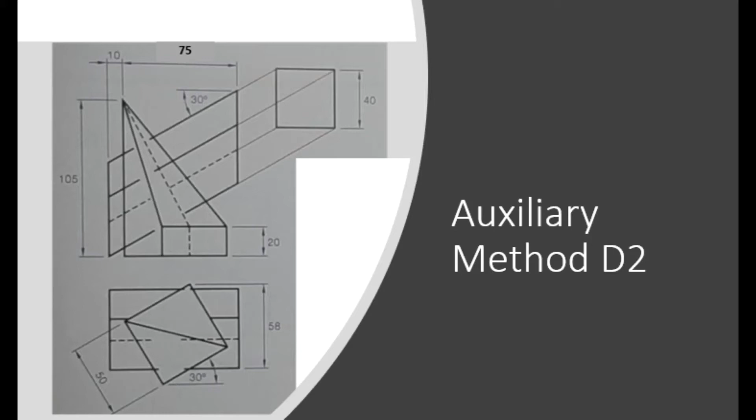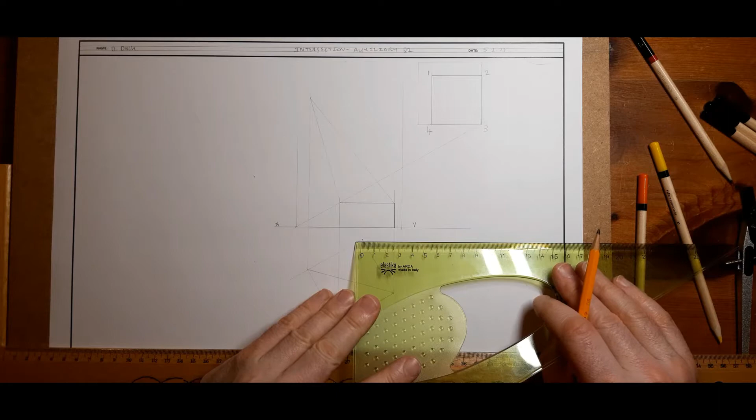Folks, welcome to the second question on intersection with the auxiliary method. I've gone ahead and set up this much of the question to save time. It's based on a 50mm square, and when you look down at it in plan, the object rises up to a point and is intersected by the square-based prism, which I've drawn and labeled 1, 2, 3, 4. For page spacing, I kept my XY line down 140mm, and this corner here in 160mm from the edge. We'll kick off from there.

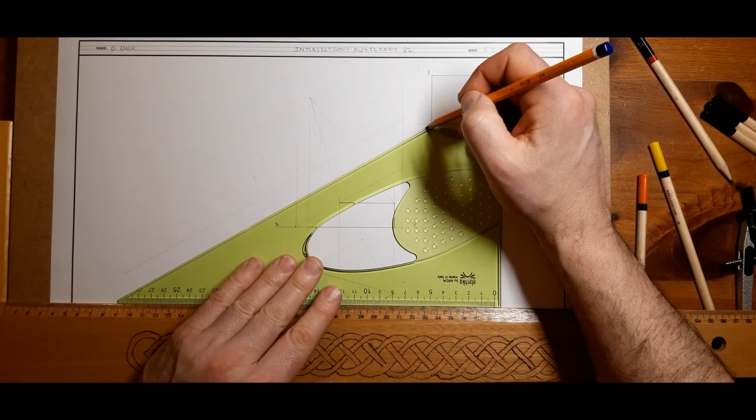So I have the 1, 2, 3, 4 set up. Next, I'll bring down these lines, and in fact you might as well run them down longer - we'll need them later on when we're doing that auxiliary. I'll just throw in my X1, Y1 line now, I'll need it later on anyways.

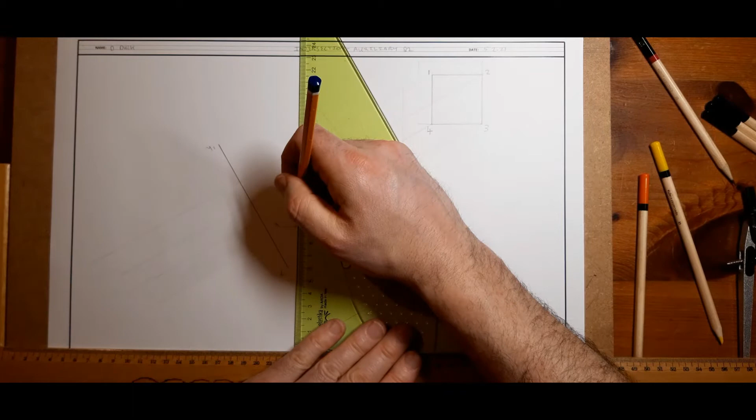Now, in these questions, they will always give you one of the lines in plan view, and it's very important that you're able to recognize which is which. As I look at the question, line 1 is going to be here, line 2 will be the near side, the far side there will be line 4, and the bottom will be line 3. Remember, if you were to stand there and look in this way, it hinges out that way - that's how it would appear flat when you look in along it. So: 1, 2, 3, and 4.

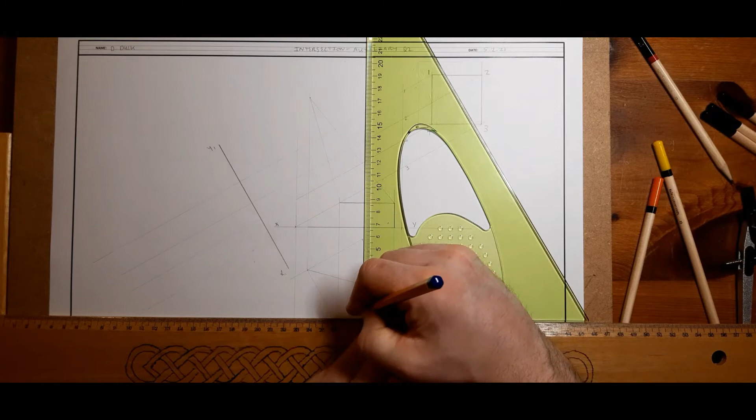Now, the only line we are given is the lowest one in plan view, and we are told that it is 58mm down from this corner here. So we'll measure down 58mm and put in a light line there.

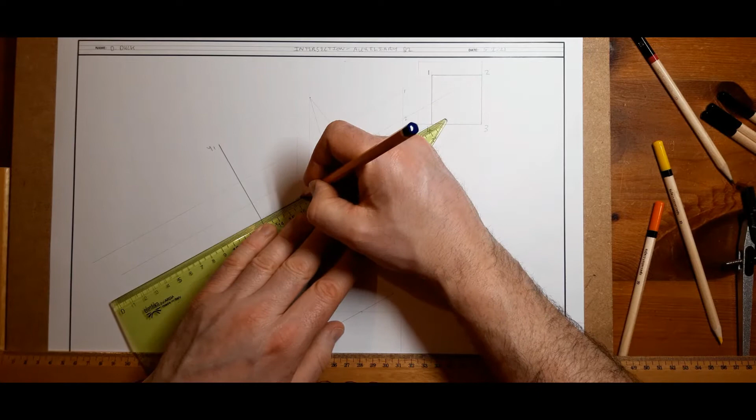Now, that is the closest line to me in plan. So when I'm looking in this way in elevation, I know that this is going to be line 2 - the closest one to me. This guy is going to be in hidden detail, we're showing that in the question, so I'll put him in dash - don't forget that. This guy is going to be the closest, line 2, so this is line 2 down here. As you stand in looking in there, the closest edge will be line 2 to us. Now, what we'll go and do after that then...

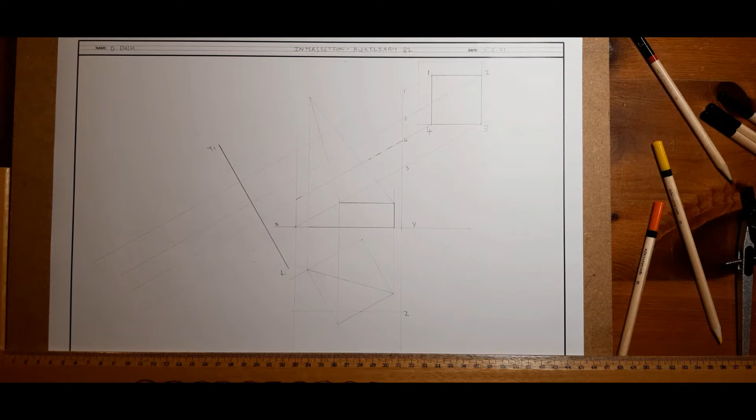So what we have to go and do after that is find out how far these are spaced apart here in plan view, and we will get those measurements up here in our auxiliary.

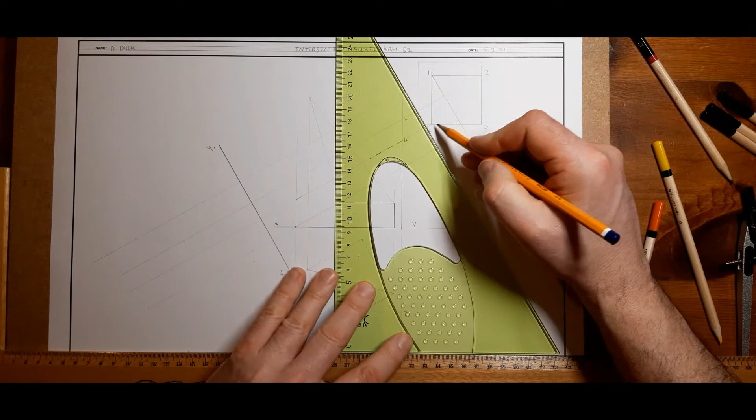This is another auxiliary of the square-based prism. So if we draw down a series of lines perpendicular to our lines of projection, I will find out - this is all like the same thing as looking directly down on top of this object - how far these are spaced apart.

So that is the distance from 4 to 1, we'll call that D1. D2 here could be from 1 to 3, call that D2. And the third distance, D3, is from 3 to 2 there. Now they do change in each view, because if 2 is the closest one up here, it's the nearest one down here then - it's the closest one to us.

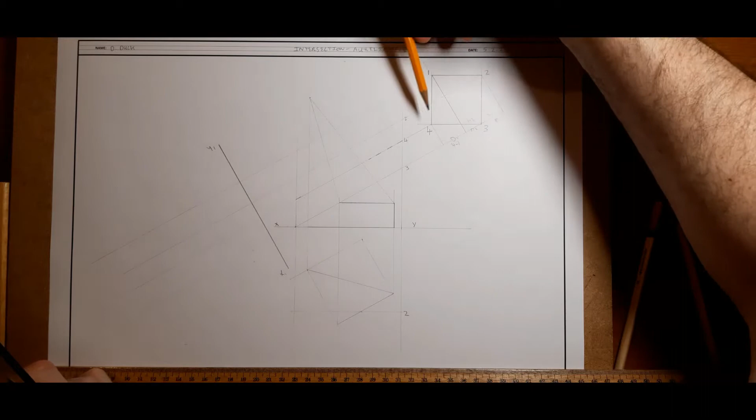So to space them out, the next one given in the question is the hidden detail one. When you look down from the top, you will see 2, 1 and 4, but this is 3, so I need that distance there. We'll get that with our compass and mark it off there, so 3 will be on that line there. I know the distance, so I can mark them off then.

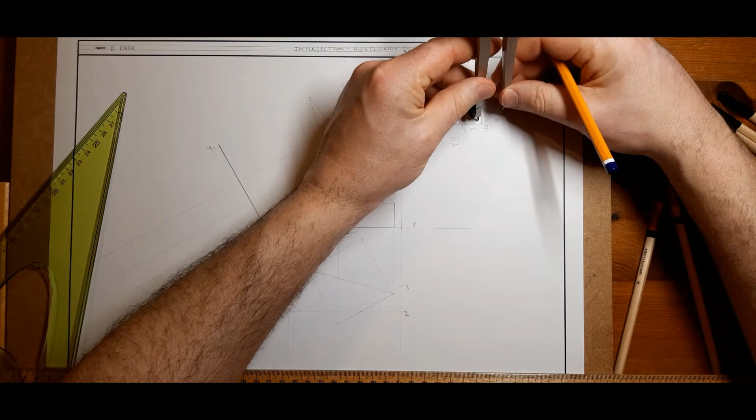The next one will be the top one - this next line, which will be my line 1 when I'm looking down on top of that. So I can get the distance from 2 to that. You could also measure this distance here and just add it on, it's the same thing. So that'll get me line 1. And then the distance from 2 to 4.

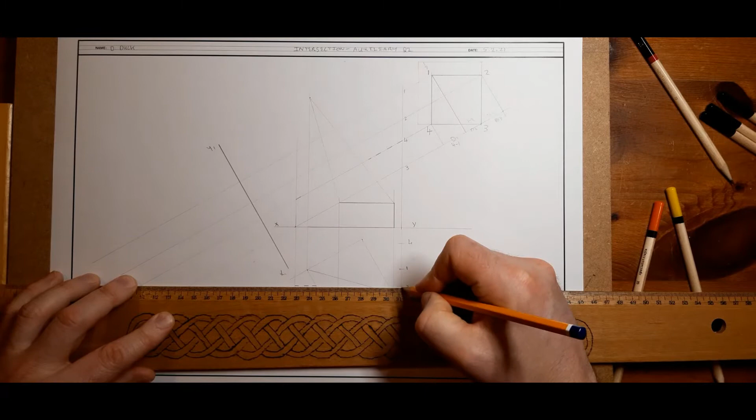And I can draw in those lines lightly now. And 3 will be in hidden detail in the plan view. 1 we'll see all of it. Just draw it in lightly so far. We don't know where it's going to start and stop, of course. And that is the plan view lightly set out in construction. So we need to find out where all these guys start and stop.

So the next thing we're going to do now is we are going to go and set up the auxiliary down here on the left hand side. So again, we need to bring down all points, and actually we have it set up at 30 degrees this time, which is very handy for us. So we can bring down all points of interest to us.

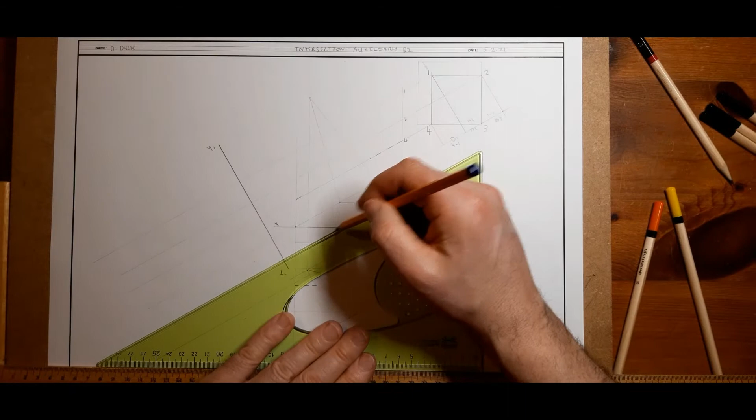And we'll just label them then for clarity. So we have these 1, 2, 3, 4. I'll call the main corners on this A, B, C. O is there, so we'll just leave it. That could be a corner as well. We'll just call that O.

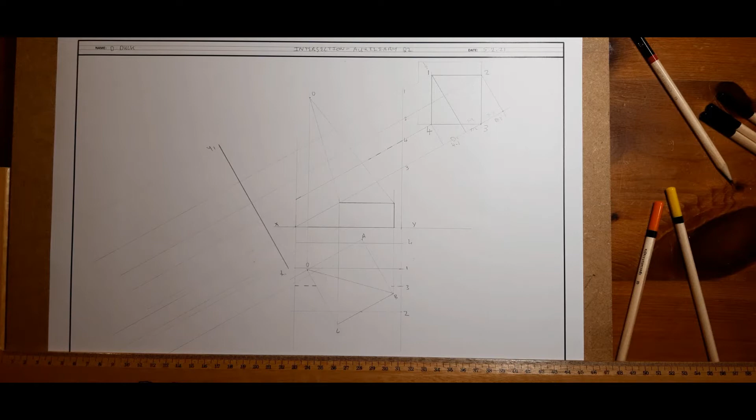And we'll just measure them out now and we'll get them set up in the plan view. So again, this is a new view. 1 view is back, 2 views back. The measurements are the same. So we can start off there. I usually, when I'm marking these off, I go with the first point away, which is C.

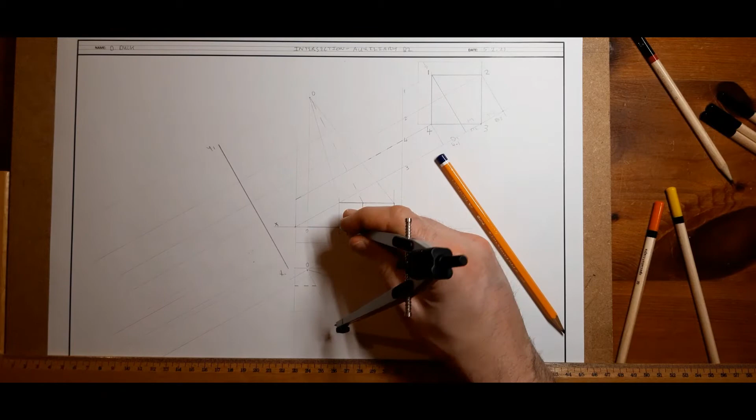We'll just label them there now as well in elevation to avoid any confusion later on. That corner now in elevation beyond the back. That's A, C, and B, and we'll call that corner O. So I get the first one away usually. Mark off C, put it down here. Let's see, and we'll keep going through them now.

Measure B here off the XY line. Move it over. And then I need to continue on that. And so on. So I'll stop talking now and I'll measure off all the rest of my points.

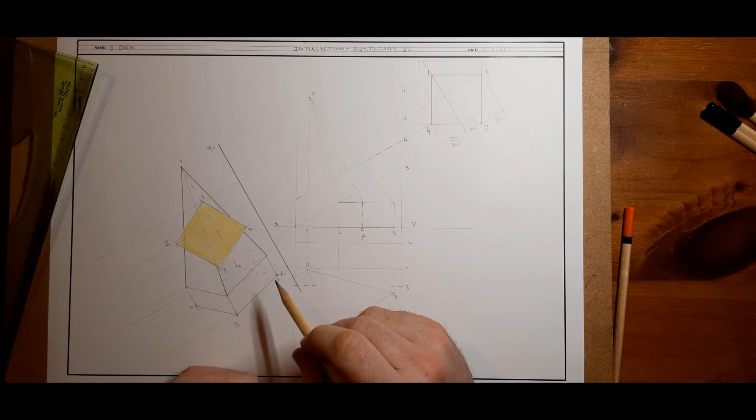Now, so when we have that set up, we now see looking in at our square base prism intersecting that object, okay? And now we're going to mark off all the points of interest to us. Now, because it's sticking out on the left-hand side and on the right, 2 and 4 are not going to come into play as we look in here at it. So what we're going to get out of that is we're going to get a line of intersection like a loop on the top, and we're going to get a line of intersection on the bottom.

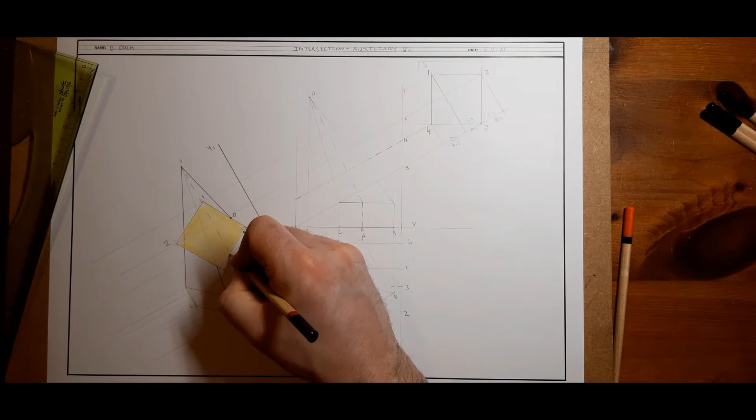So let's label up all points. So we called that already. I already used up A, B, and C, so we'll just continue on from there then. So starting at 1, if I go clockwise, first point of interest there will be D. Go to 4, I call this guy E. Point of interest there at the back, F. Down to 3, up to G, over here to H, up to 2, over here to I. Another one here at J, and there's one again there on the back, K, just before it goes back to corner 1. Okay, so a good few points there.

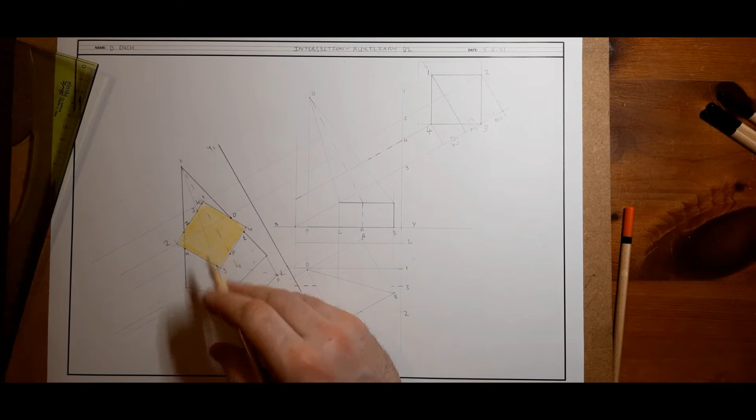So we've got to take into account for that now. So again, if I was to, I would encourage you to go labeling that.

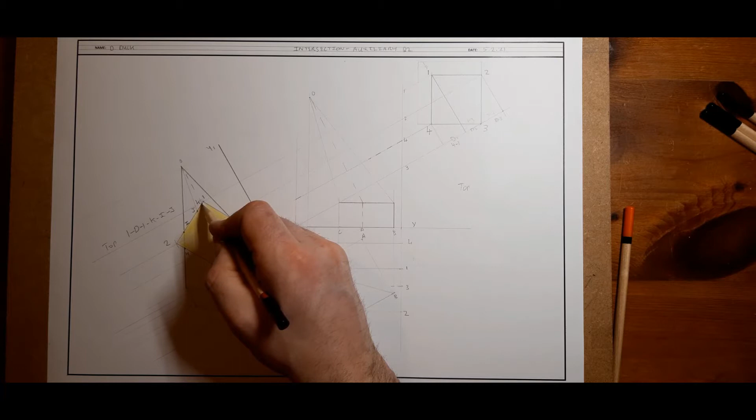So maybe on the top, as we want to call it over here, you can write it over here if you find it handier. On the top, the line of intersection is going to go from, on the near side now as we see it, from 1 to D. It's going to turn the corner at D, okay, and it's going to go back up to 1 on the far side. Then from 1 on the back side, it's going to go to K. From K, on the back corner there, it's going to come all the way down to I, turn the corner back onto this face here, up onto J, and then from J, it's going to go straight to 1, not to K, because K is on the back side. So it's doing a loop from one side to the other.

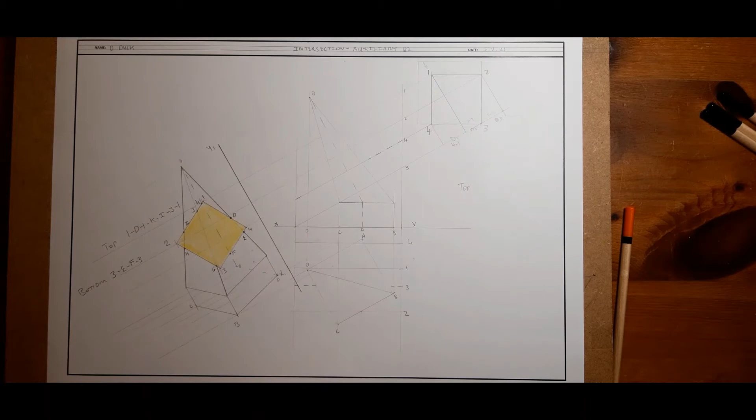On the bottom then, if we want to put it in there, so let's start off at 3, for example. So we'll go from 3, on the near side as we see it, to E. Then from E, it'll go on the back face there down to F. Then it will go from F to 3, on the back. Then from 3, it will go all the way up to H. And then it will go from H down to G. And finally then from G back to 3. So again, it has done a loop right around the object.

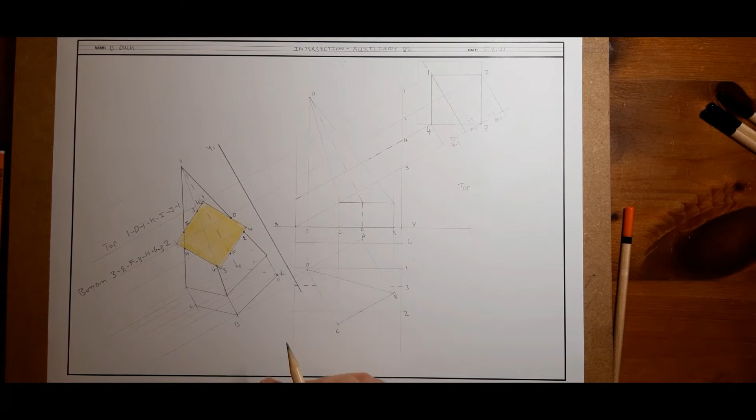And if we follow these when we're reconnecting the lines, we can't go wrong. Okay, so that's the beauty about doing that, taking that moment to do that. So now finding some of these will not be a problem. I'll just put B higher up there and C and A. So let's find as many of these points as we can now in our elevation first of all.

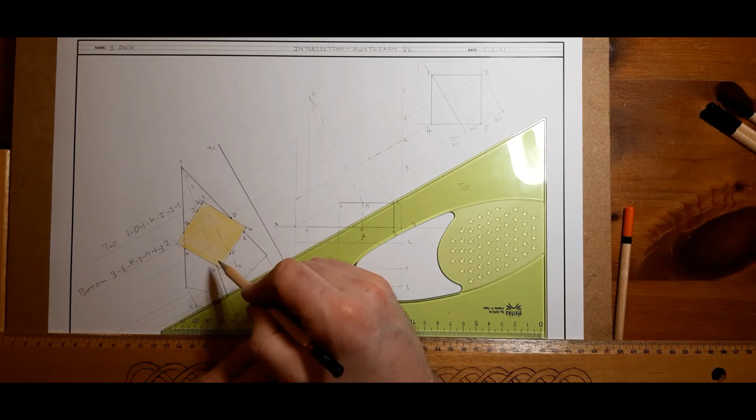So for example, when we're looking at G, it's the lowest down one. G is on the corner from B to the top of the object. So we'll bring that up there. There's line B, going up to the top of the object. So that gets me G there.

And we keep doing the same for the rest of them. F is on that back corner, going from C on the bottom to the top. So bring that up there. That gets me F.

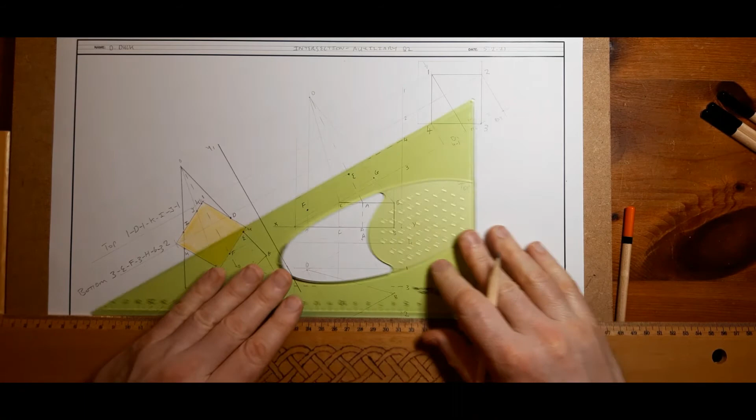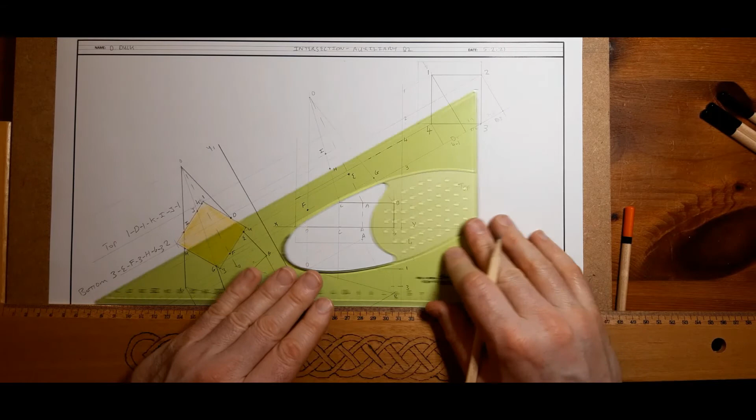Next one, E is on this corner from A to the top. So find that one there. E will be there. H is on the corner from C to the top. That will get me H. I is also on this line. And D is on that corner from A.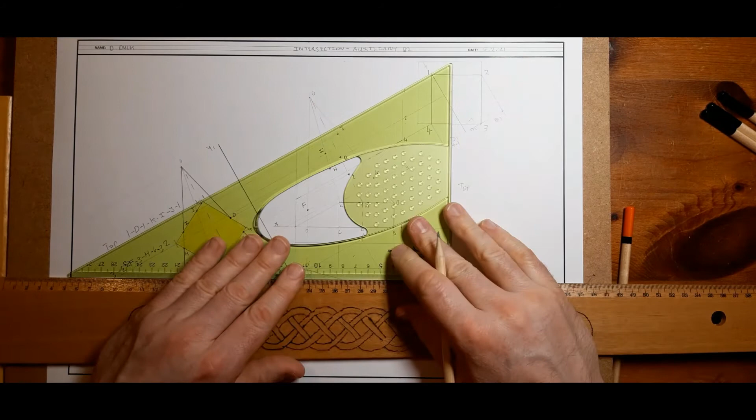And then we have J coming up here. J is on the corner from B to the top. K is on the back corner.

And this is the beauty about labeling, folks. I have to say, if I didn't label that, there is no way I would be able to do that. So make sure you label all these drawings.

Now after that, we have all our points there. We still need to find out, 2 and 4 won't come into play, but 3 and 1 will, so we need to find those points. Remember, there's a 3 on the near side and a 3 on the back side of this object. Same with 1, there's a 1 on the near side and a 1 on the back side of the object.

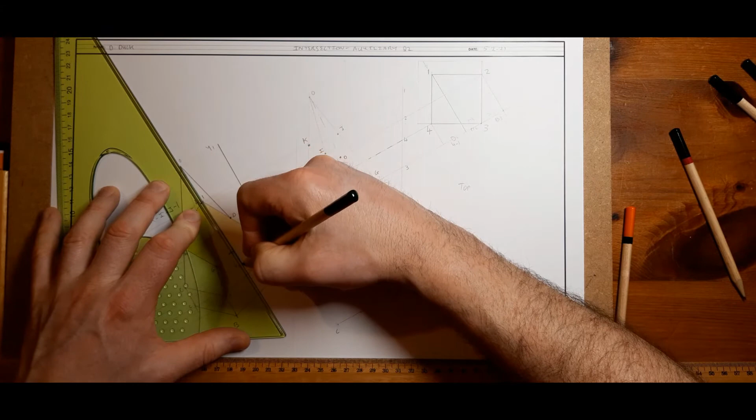So I'll use green here to find 1. I'll start at the top, drawing this line in here through 1, on down till we hit the base there. And we'll recreate this up now in our plane or in our elevation. So if I follow that line up there, it hits the ground there between O and A. And I'll redraw in that green line.

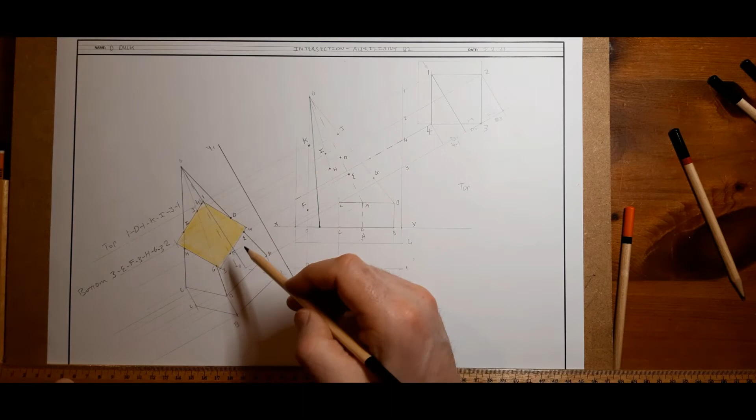And now I can find point 1 on that. Now that'll just get me point 1 on the back side, by the way. That is point 1 on the back side.

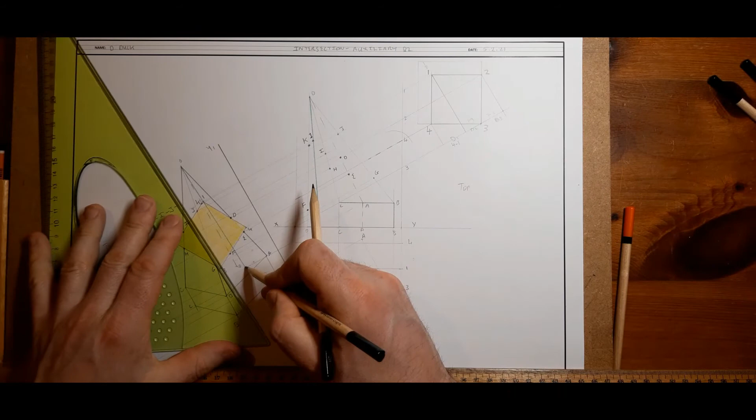Now I'm going to extend this line because I need to find 1 on the front. So I'm going to extend down this line and it's going to hit the line now between B and A. So let's get that point in our elevation. There's the line between B and A, and I'll redraw in that green line. And it will cross here. That will find me 1 up here.

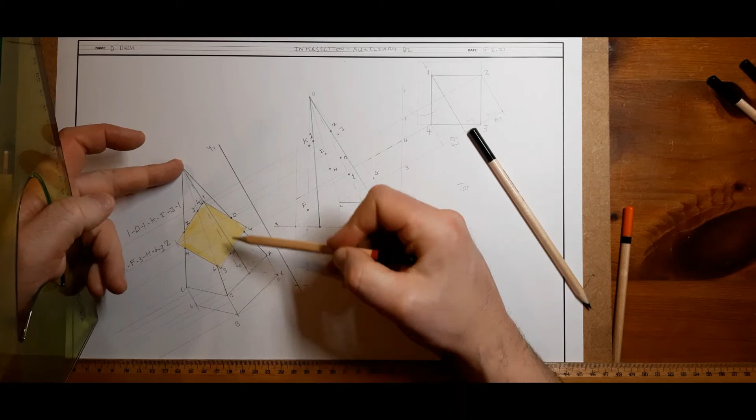So the first green line only went down to the bottom. That was to get the 1 on the back. Then I extended the green line down, because I need to find 1 on the front. So 1 on the front is happening on this surface here. And so I stopped on BA, found that, and that got me the point 1.

And I'm going to do the same thing over here now to get point 3. So first of all, there's a 3 in the back. Let's find that guy first. And I just need to join in my corner here to do that.

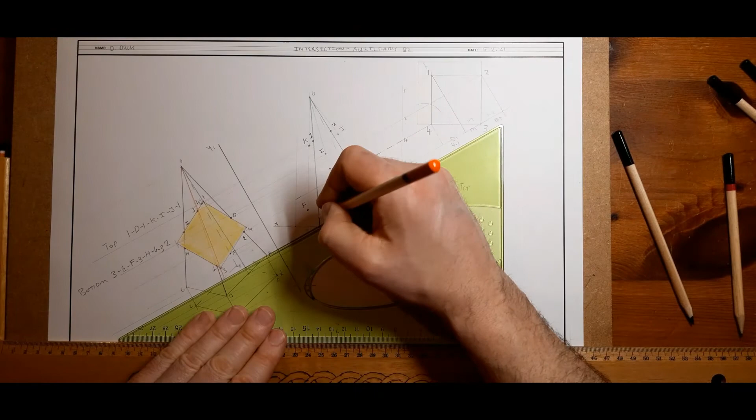So I'm starting at the top, drawing in this line, this orange line through 3, down till it hits the ground. So we find that line in elevation, bring it up there, that's where it hits the ground. This will get us 3 on the back side now.

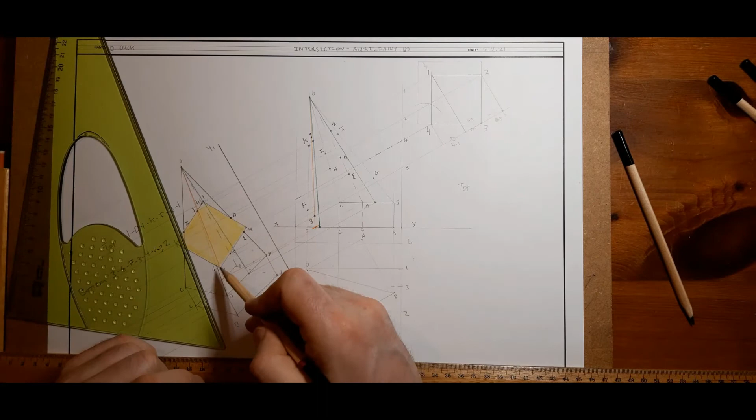And 3 is on this line. And now we need 3 on the front. So 3 on the front, we'll just extend it down now. Start at the top, draw through 3, and it hits the line BA right here. Let's find that in elevation. And redraw in that for the front side of the object. That will get me 3.

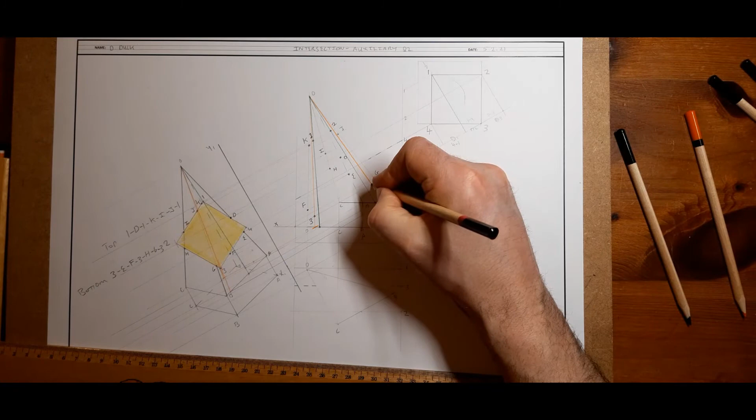Now I'll just pause for a second. So these drawings are going to be quite detailed. Once you get used to them, they're not hard at all, but they are time consuming. Okay, so we've got all our points now for our elevation. So I think it'd be a good idea now maybe if we go ahead and draw in as much of this as we can.

Point 2 is not going to come into play. So when we're looking in elevation, we can see that point 2 is not coming into play at all with the object. So up here, you can draw that guy heavy right across there.

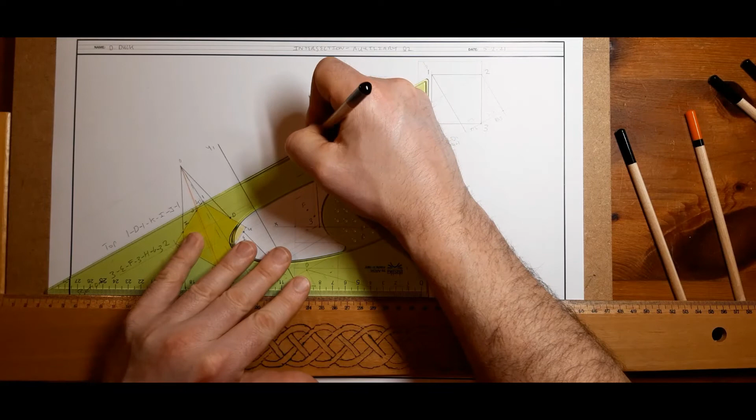We can see how far these guys come in now. He comes in as far as 1 there. It'll be slightly in hidden detail, a tiny bit of it. On the back, a slight bit of hidden detail to get out to the edge of the object. And then he goes down as far as there. 4 does not come into play at all because he's outside the object. We can see that there, so we can just put him in hidden detail going right through the object.

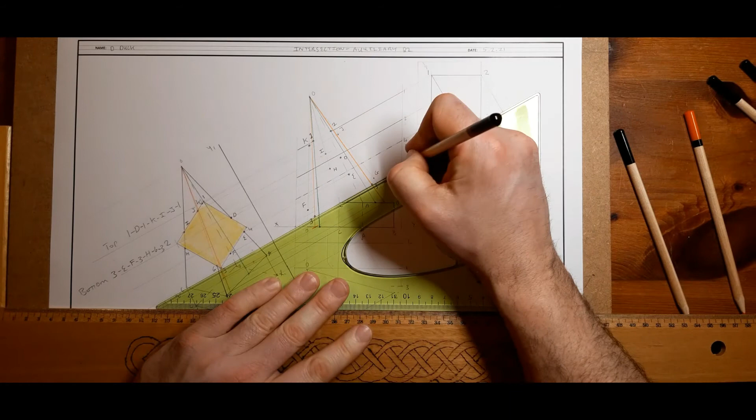And then 3, we can see where 3 is there now. 3 is on this side just behind it, so we won't see it, we'll see it up as far as here, and then this piece here will be hidden detail. On the back, we'll be able to see it, that's fine. Where he hits that face, between O and C, we will be able to see that. So we're okay there.

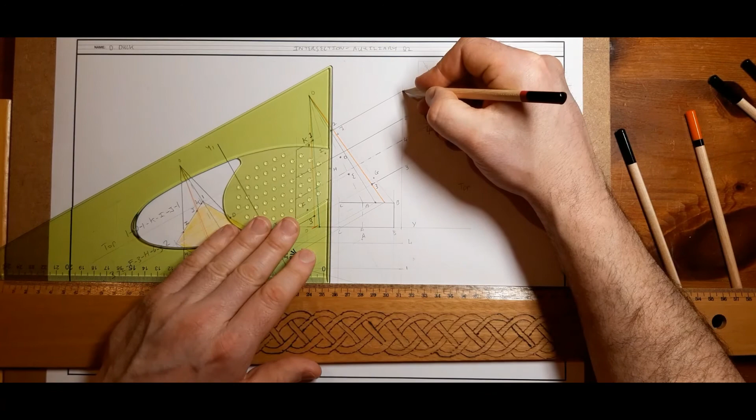Now, I always recommend you do these lines first, to help you with the visualization. So we've got that now. Now it is time to do the line of intersection. And again, if we follow this, we cannot go wrong.

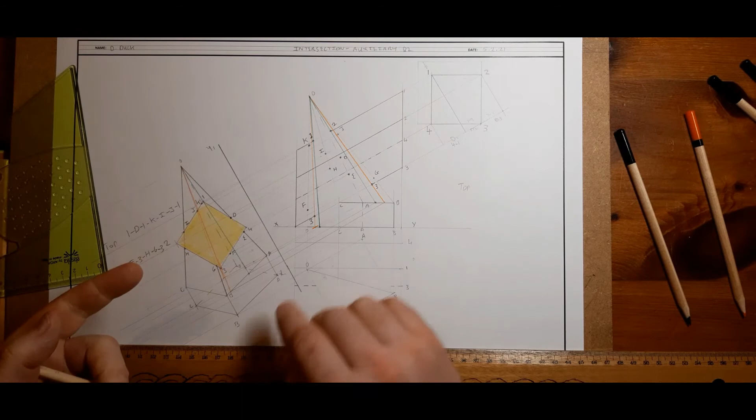So remember now, when your elevation is there, this will be the closest side to you as you look in here. So you'll be able to see all this, the full line of 2 there. There it is in our auxiliary, there it is in our elevation.

So that means we'll be able to see, for example, on the near side there, where 1 is going down to J. Let's do that a bit heavier. It's going to go down to J, turn the corner at I, as we said, and go back up around. So we'll start off by labeling our drawing.

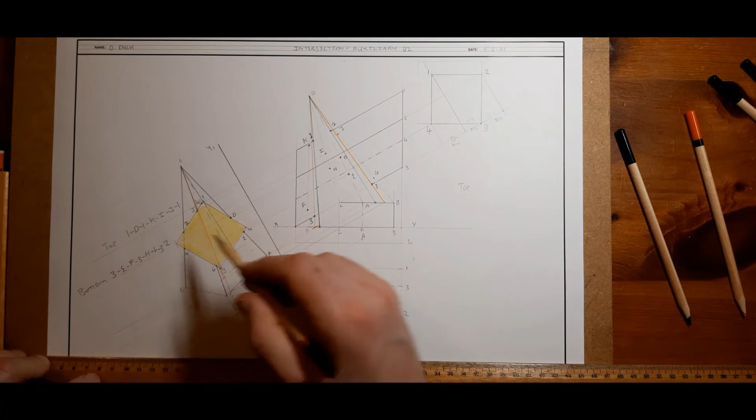Following this, we'll start there and go with the sequencing, and we can't go wrong. So if we start on the back side and go from 1 to D, and then we're going to come back up to 1, that's going to be in hidden detail, we won't be able to see that bit.

1 to D, back up to 1. Next one, actually I went the other way when I was sequencing this, but it doesn't matter, we'll go this way. So 1 to D, back up to 1, then we're going to go to K, that's going to be in hidden detail there. And then at K, from K on, we'll be able to see what's happening.

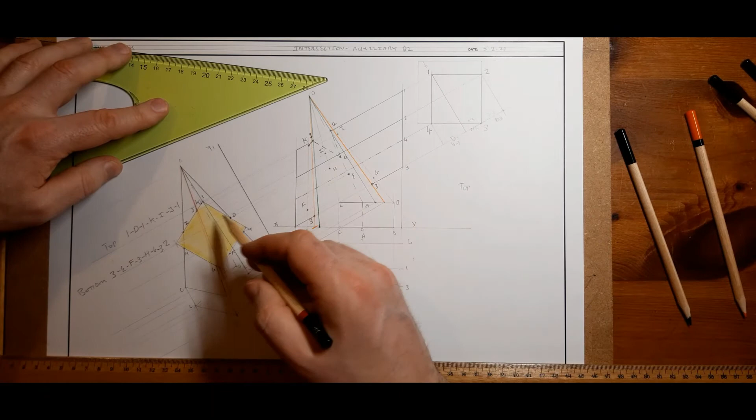We will go from K to I, then from I up to J, and then from J we are going back to 1 there.

So we'll start off now and finish out the bottom side as well, going by our 3 sequencing. Remember, you'll be able to see this side and the other side around the corner, but this back side, this face here, you will not be able to see. So if we start at 3, we're going to go from 3 to E, in hidden detail, then E to F, hidden detail.

Then it'll become visible in elevation, it will come into view. We'll be able to go from F back to 3, we'll see that. We'll be able to go from 3 up to H, H down to G, and back to 3 then in hidden detail. So let's do that.

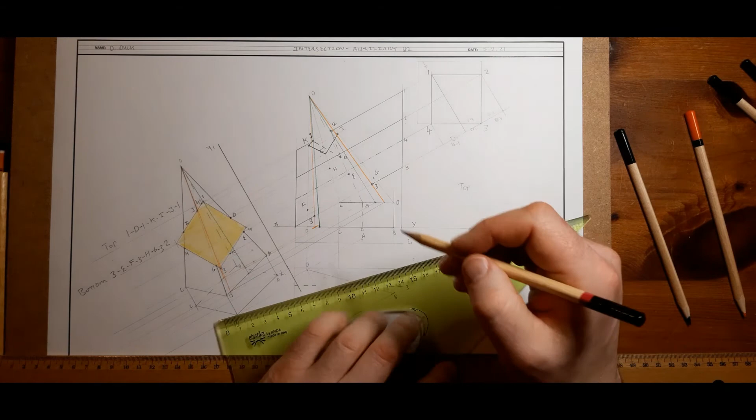Starting off there, as we said, we're going to go from 3 up to E.

So now we'll finish out the bottom side there and use our number sequencing again. Just remember you can see this side in your elevation and the side around the corner, but you can't see this face or the one on the back side here. So if we start there, this 3 will start on the near side. So 3 is going to go to E, we won't be able to see that, in hidden detail. E then will go down to F.

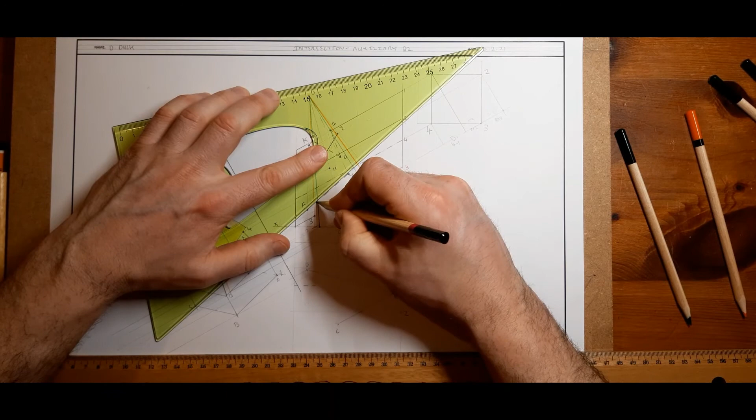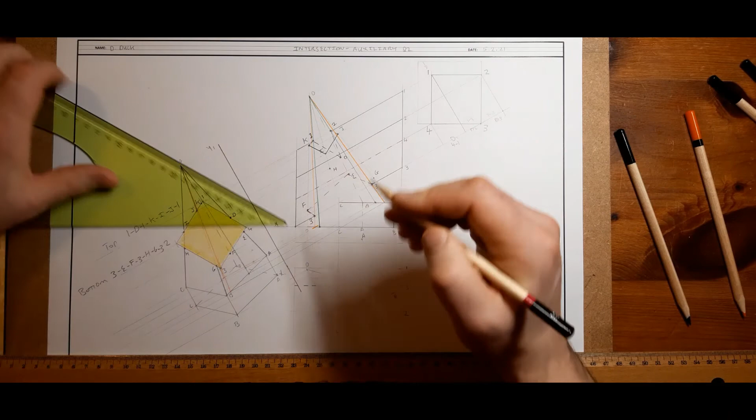F then will go back to 3, and from this point on we'll be able to see just that piece there. 3 then is going to go from 3 up to H, but that will be in hidden detail because of the way the object is twisted. So 3 is going to go up to H.

Then from H, following our sequencing, we're going back down to G. We'll be able to see that, it's on this face here. G to 3 we will not be able to see. That's our last point to join up.

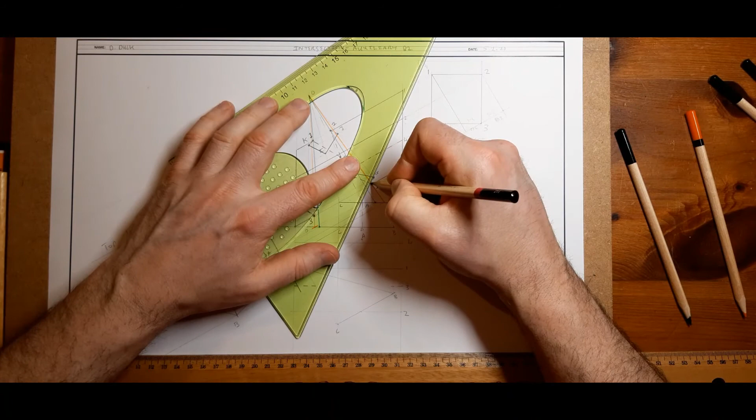And we can finish out our corners heavy now in elevation to help with the visualization.

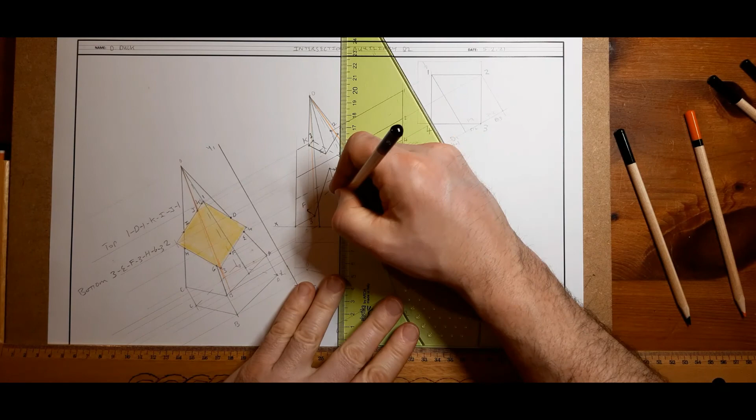Now the next thing we're going to do is get all the points. I'm going to locate down these here, and then I'll talk us through finishing them again. It will be the same anyway, following that sequence, just the lines of what you can see and not see will be slightly different.

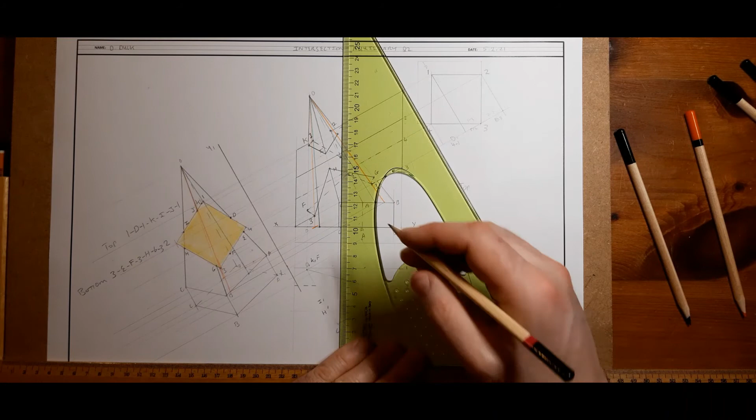Hi folks, you might notice some of the drawing has been coloured in, and I've got all the points in plan view. My phone died, so while waiting for it to charge, I coloured it in as well to help with the visualization. We'll continue on now and finish off the plan view.

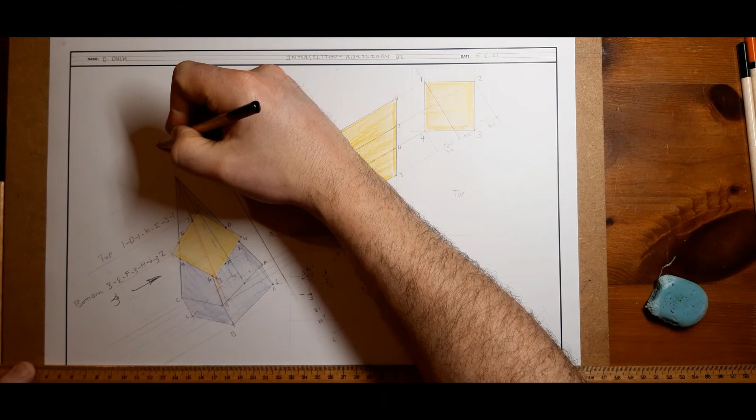So again, I'm going to use the sequence we lined up. Now remember, when you're drawing your elevation, you were looking in this way. But when doing our plan view, just for seeing what lines we will and won't see, you have to imagine yourself looking in from above, looking directly down on that.

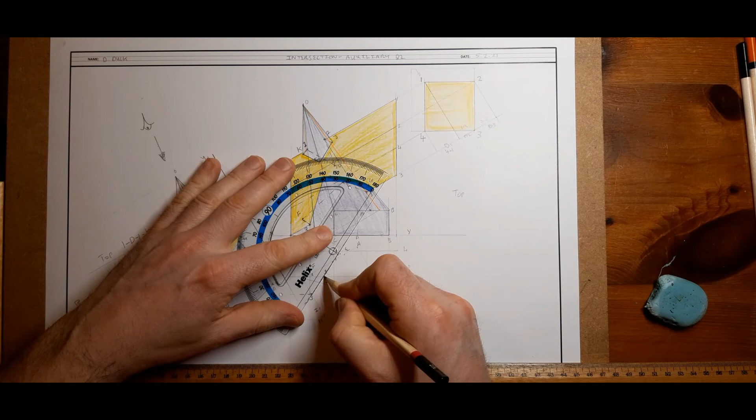So I'm going to start at 1, and go off down here. You can see there, if you're looking straight down, you would see going from 1 to D. I'll draw that heavy there. Then it's going to go from D back up to 1 on the far side.

After that, at 1, we're going to go to K, which is up here, right on the corner. Then we're going to go from K to I, and then from I to J, and then from J back to 1. And we will see all of that. At that stage, you can draw in your lines heavy as well.

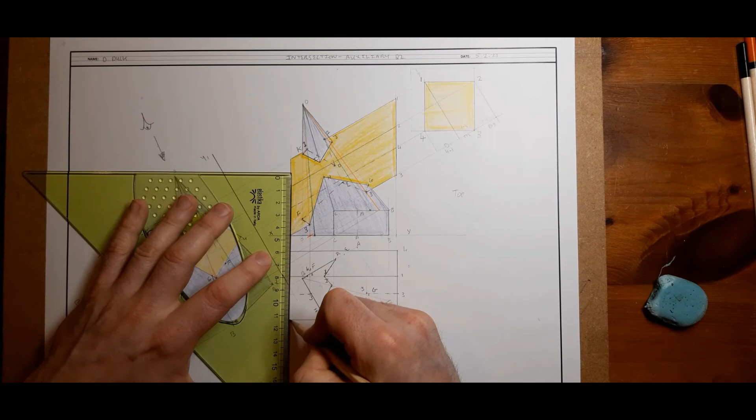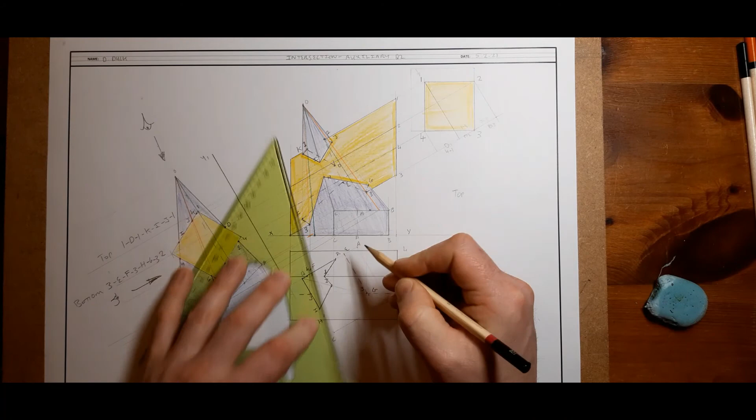Now we're going to do the line of intersection on the bottom side, and all of this will be in hidden detail. So we'll start there at 3, and go to E. We'll go from E to F. F was on this corner here, remember? F back to 3, which we won't see, we'll bring it down as far as there.

We're going to go from 3 to H, so we'll only partially see that. When we get to H, we're going back to G. And then we're going from G back to 3 finally. Okay, and we can do in our bits of hidden detail as well.

And that is our drawing finished out. I'm just going to colour it out for the visualization. Just to say, I know it seems like it will take you a while doing the first couple of these questions. Thankfully the ones in the exams aren't always so complicated, more like the first question we did. But you have to practice it, and you have to be doing your labelling. So we'll stop talking and I'll finish colouring this in.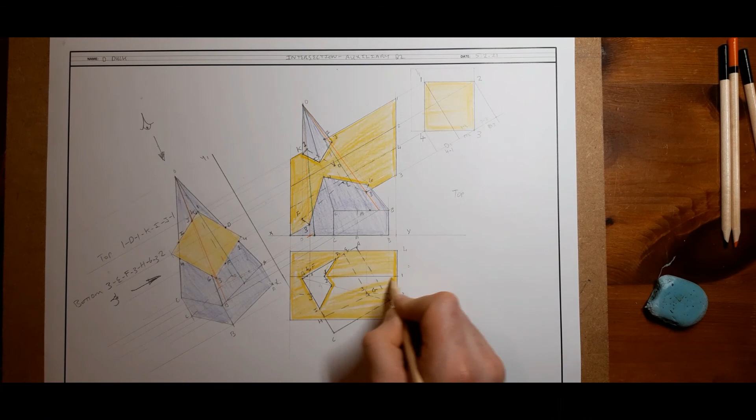One thing I'd say before we leave that: when you're joining these in, wondering about what you'll see and won't see, you're looking in from this side here to see your elevation. When looking at the plan, you're looking down here. The key is the sequencing. Once you do that up right, you cannot go wrong. It must join together. And if you were in an exam and unsure whether it's hidden detail or not, just draw them in, folks.

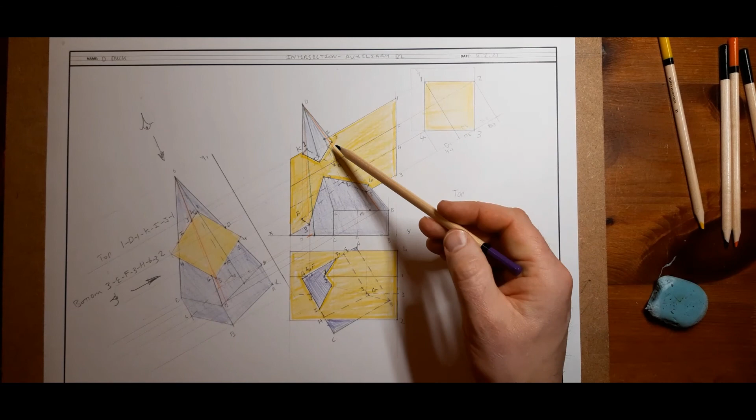Because I think out of 45 marks for a question, if I remember correctly, it was only 2 marks for getting the hidden detail right. So hope you didn't find that too long or too tough, but it is a good topic to do. In the exam, with the 35 minutes you'd have, you'd find it would take nearly that full 35 minutes to do them. So more videos to come soon, folks. Take care and stay safe.